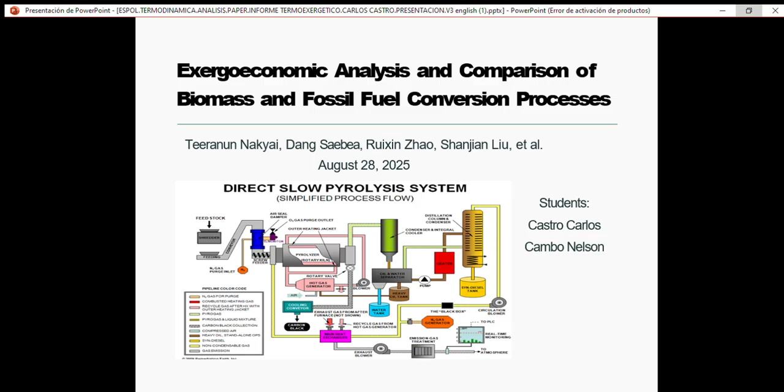General objective. The main objective for this presentation is clear. We want to analyze in detail two key processes: biomass pyrolysis, especially corn stover, and syngas production from coal, natural gas, and biomass. This study combines four perspectives: energy efficiency, exergy efficiency, economics, and environmental impact.

This integrated approach allows us to see not only the numbers, but also where the process loses efficiency, where costs are high, and where emissions are critical. The goal is to identify opportunities for optimization and to show which processes are more sustainable for the future.

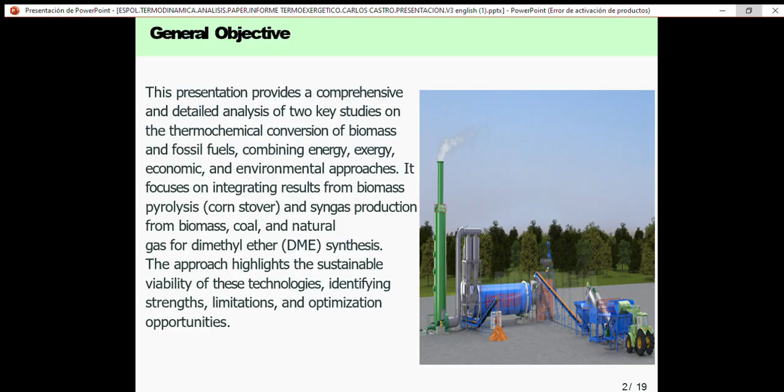The structure of the presentation is divided into 5 main parts. First, introduction and context. Second, the methodology and analysis. Third, detailed analysis of biomass pyrolysis. Fourth, the exergoeconomic comparison for syngas production. Finally, discussions, conclusions, and recommendations. This logical order takes us from theory to results and to practical implications.

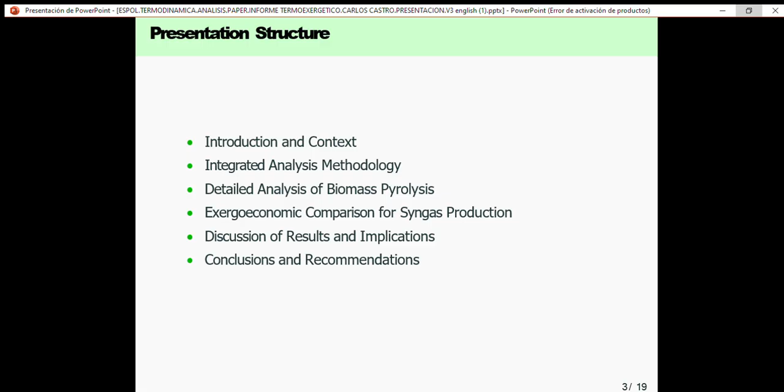Okay. Introduction: energy and environment background. Biomass is one of the most abundant renewable resources on Earth. For example, corn stover has a global potential of up to 1.2 trillion tons per year. When converted, biomass produces valuable products such as bio-oil, biochar, and gases. This reduces dependence on fossil fuels.

Another important product is syngas, which is the basis for the production of DME, dimethyl ether. DME is a clean alternative fuel and the global market is expected to grow quickly. At the same time, climate change pushes the need for low carbon technology. Biomass is carbon neutral, while coal generates very high CO2 emissions.

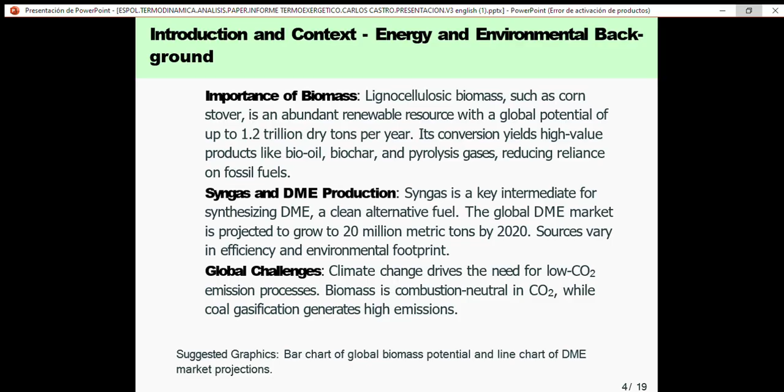Now let's see the specific objectives. First, evaluate energy and exergy efficiency. Energy efficiency shows how much of the input energy becomes useful products. And exergy efficiency is more advanced because it includes the quality of the energy and identifies irreversibility.

Second, analyze the economic costs. This shows which steps make the process more expensive. Third, compare environmental impacts, especially CO2 emissions and global warming potential. Finally, provide recommendations for industrialization and optimization.

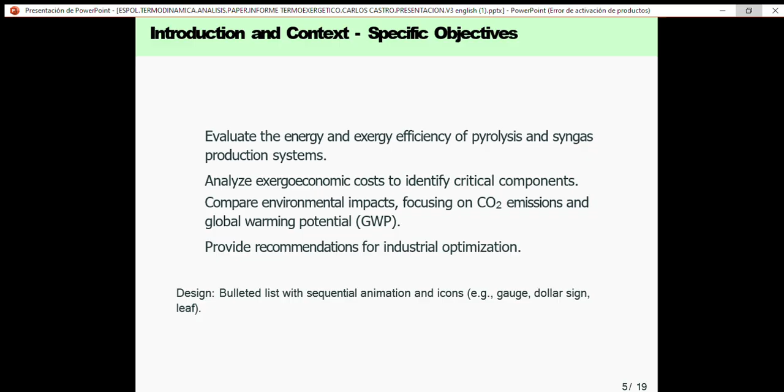In this slide, we are going to speak about the modeling and simulation of the process. We used Aspen Plus software. For pyrolysis, we simulate a plant processing 10,000 tons per year of corn stover. For syngas production, we use gasification and tri-reformer models. The error was less than 2.5%, so the results are reliable.

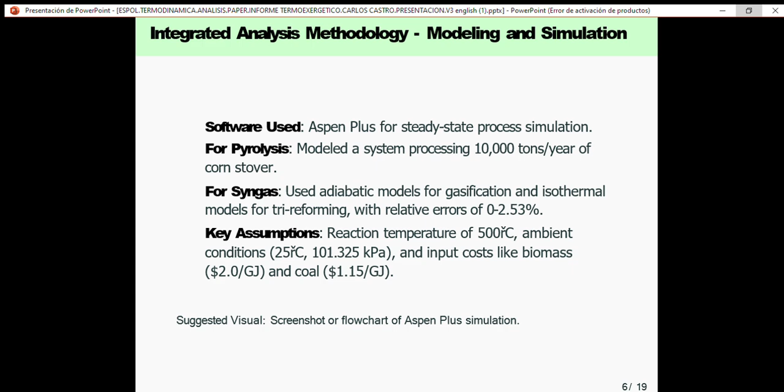In this case, for energy and exergy analysis, we applied the first and the second law of thermodynamics. Energy efficiency is the ratio of produced energy to input energy. Exergy efficiency considers physical and chemical exergy. It allows us to see where energy is destroyed or lost. In pyrolysis, the largest exergy destruction happens during combustion. The second largest loss comes from pyrolysis itself. This analysis shows us the weak points of the systems.

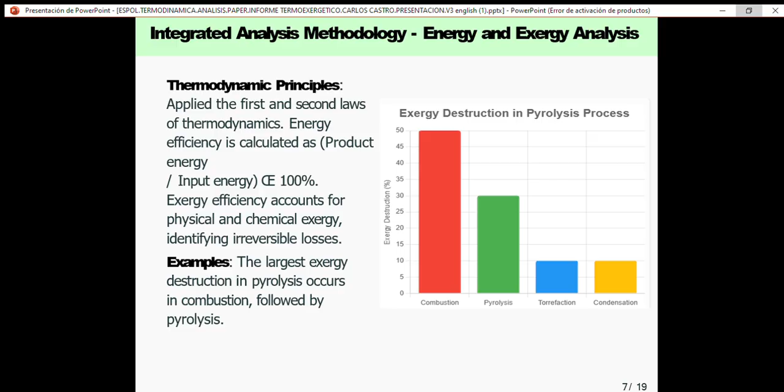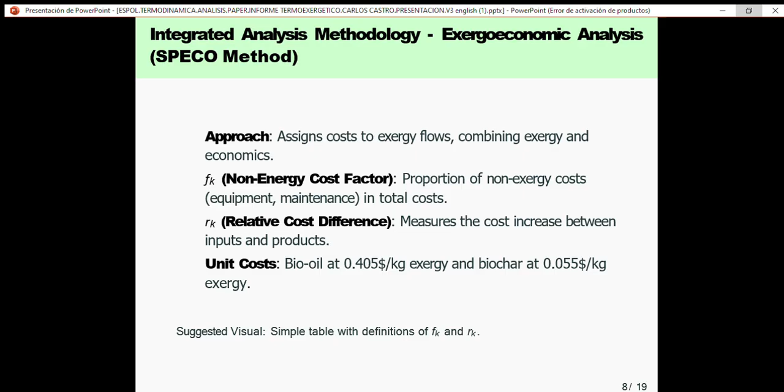Now the exergoeconomic analysis, SPECO. We use the SPECO method, which assigns costs to exergy flows. The factor f represents non-energy costs such as equipment, maintenance, and labor. The factor r shows the cost difference between the inputs and products.

For example, the bio-oil has a cost of $0.405 per kilogram of exergy. Biochar is cheaper, only $0.055 per kilogram. This tells us where the process is expensive and where optimization is needed.

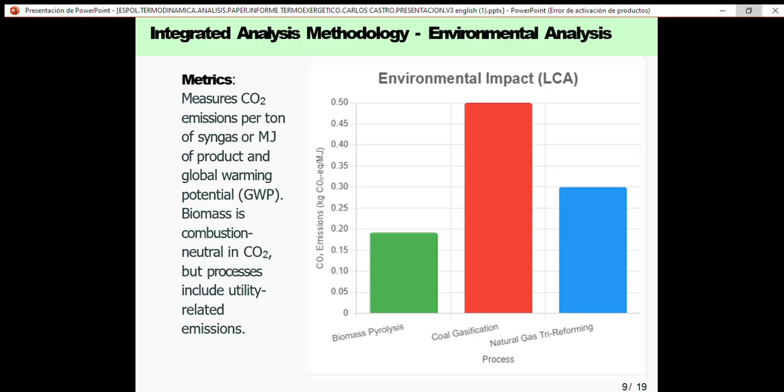In this slide, finally, the environmental analysis: we measure CO2 emissions per tonne of syngas or per megajoule of product. We also calculate the global warming potential. Even though biomass is carbon neutral in combustion, we must include emissions from utilities such as electricity and heat. This connects the technical result with environmental performance.

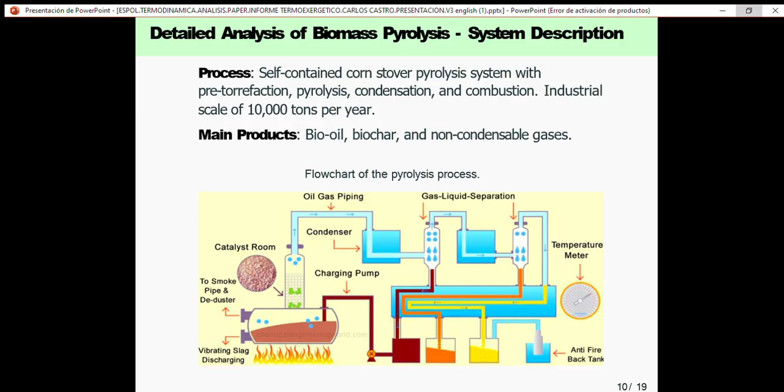In this case, the pyrolysis system results. The system has four stages: pre-torrefaction, pyrolysis, condensation, and combustion. Industrial scale, 10,000 tons per year of corn stover. Main products bio-oil, biochar, and gas. This shows how agricultural residues can be transformed into valuable products instead of being waste.

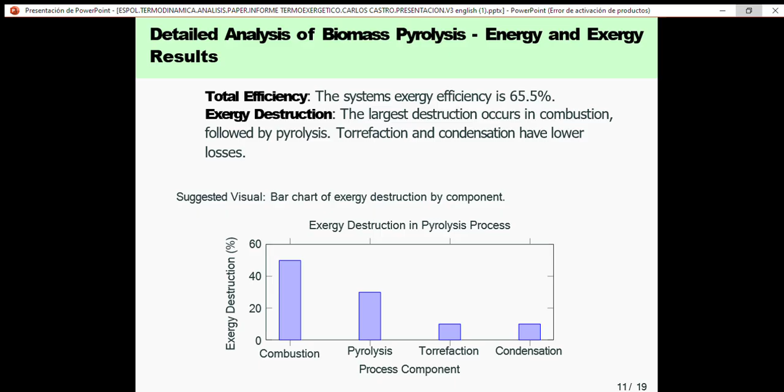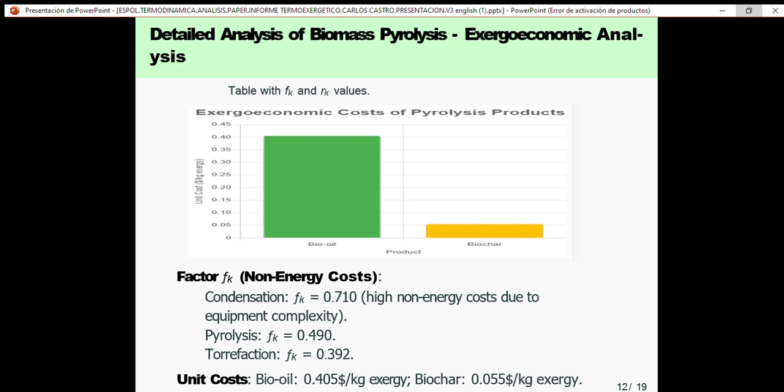The total exergy efficiency of the system is 65.5%. The largest destruction happens in combustion. The second largest is in the pyrolysis stage, and torrefaction and condensation have lower losses. Improvements should focus on combustion and pyrolysis.

Pyrolysis cost. From the cost perspective, condensation is the most expensive step. Its f_k value is 0.71 because the equipment is complex. Pyrolysis has 0.49 and torrefaction has 0.39. Product unit cost: bio-oil $0.405 per kilogram and biochar $0.055 per kilogram.

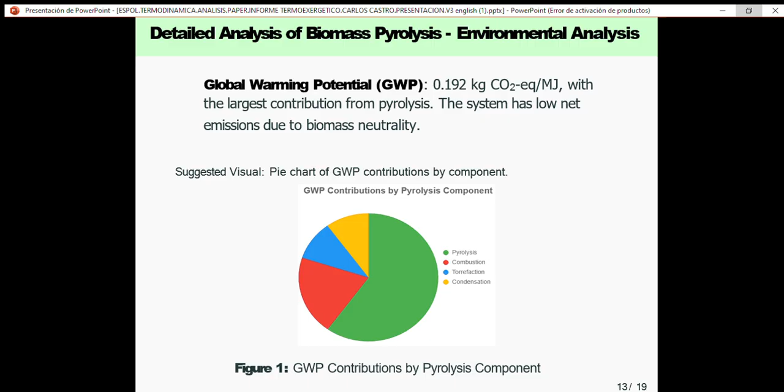In this slide, pyrolysis environment: the global warming potential of the system is 0.192 kilograms of CO2 equivalent per megajoule. The largest contribution comes from pyrolysis, but overall emissions are low thanks to biomass neutrality.

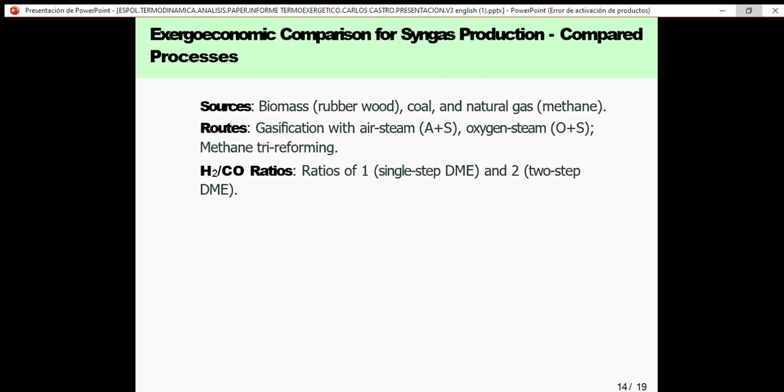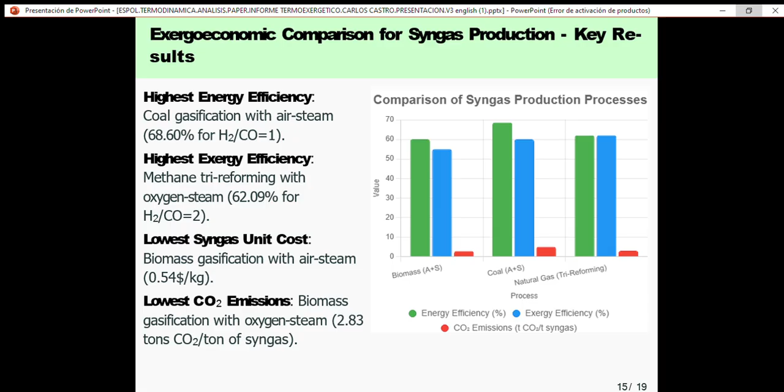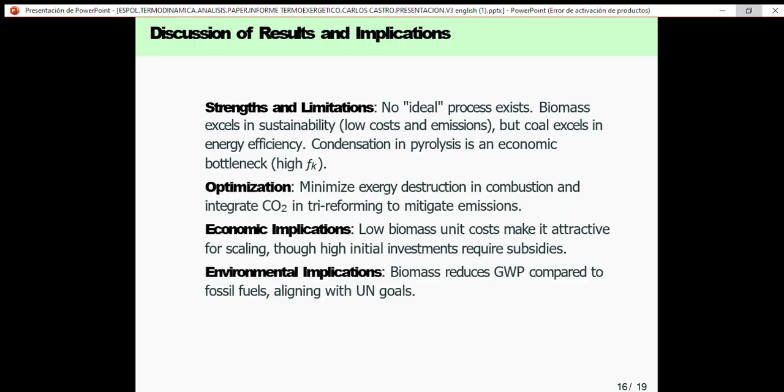The main conclusions are: biomass gasification is optimal in cost and environmental impact. Corn stover pyrolysis reaches 65.5% efficiency. There is no universal best process because the choice depends on priorities, for example, efficiency, cost, or sustainability. Biomass gasification is optimal in cost and environmental impact. Corn stover pyrolysis results in 65% efficiency.

Finally, recommendations. Prioritize biomass for sustainable projects. Perform life cycle assessment before implementation and invest in research to reduce the Z factor in critical components, especially condensation. Promote policies and incentives for renewable energy.